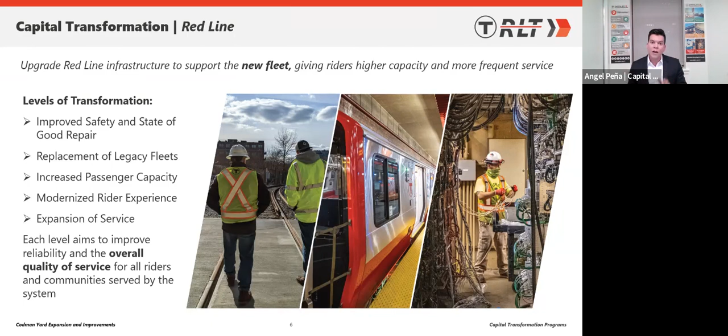Yards offer a designated place away from the main line where cars are cleaned, doors are inspected, parts are repaired, and wheels are adjusted. The yards and their facilities are critical for delivering that quieter, cleaner, and safer service you all deserve. In addition, yards provide a space for our new vehicles to be commissioned and stored without disrupting regular service, and on-time deployment of new vehicles is critical for higher capacity and increased frequency.

So here's a quick video showcasing those upgrades to give you an idea what all the yards and improvements are about.

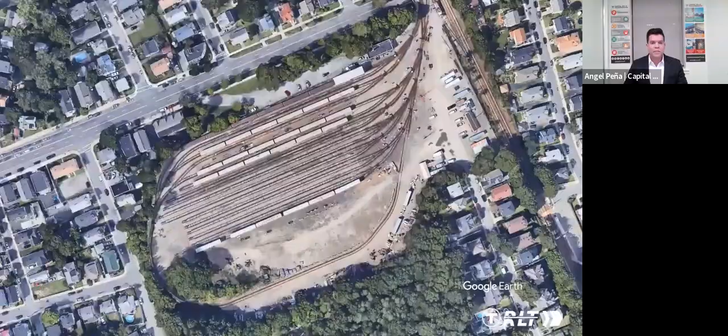The Codman Yard expansion and improvements has reached 100% design. Improvements made to this yard will bring fundamental benefits to the entire Red Line system. Like all capital transformation advancements, our goal is to improve reliability and overall quality of service for all riders and communities served by the system.

All existing tracks will be replaced so there will be less noise and faster turnback times. 6 new tracks will be added to the yard to increase storage for the new Red Line fleet. Improvements include a vehicle wash, improved inspection pit, rehabilitated storage tracks, 6 new storage tracks, and a bypass track.

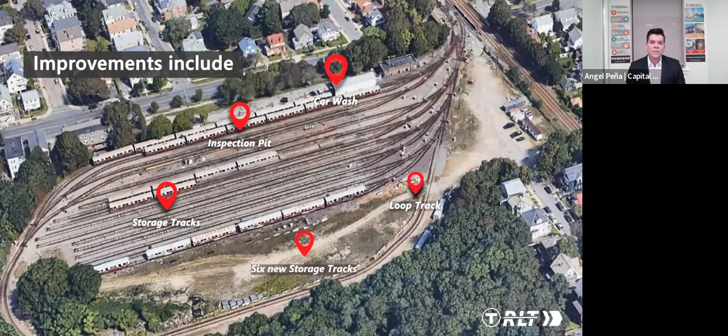These advancements will help improve reliability and efficiency, reduce service disruptions, and bring the yard to a state of good repair. Yards and their facilities help provide cleaner and safer service for the entire Red Line system. Adding additional storage tracks will provide space for over 100 vehicles. Finally, yards provide a space for our new vehicles to be commissioned and stored without disrupting regular service. Stay tuned for more exciting updates from the Red Line Transformation team.

As you can see, yards are critical to providing safe and efficient service for all riders. Although located in Dorchester, the work completed at Codman Yard will benefit the entire Red Line system, and this is why we're here. So Lisa, what are those conditions that we're facing today at Codman?

Thank you, Angel. Well, Codman Yard is one of several of our maintenance yards along the Red Line that stores, maintains, and inspects the Red Line vehicles. It's located just south of the Ashmont station in the city of Dorchester. The yard is over 100 years old and was last rebuilt in the 1980s, almost 30 to 40 years ago.

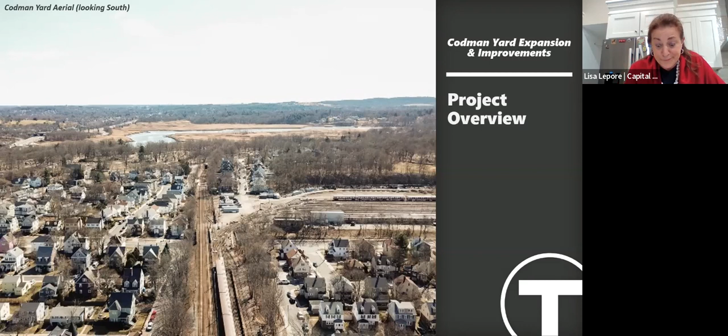The other improvement we want to add is that it currently does not have the adequate security features that we want to have in our yards, such as lighting, CCTV, and other security measures.

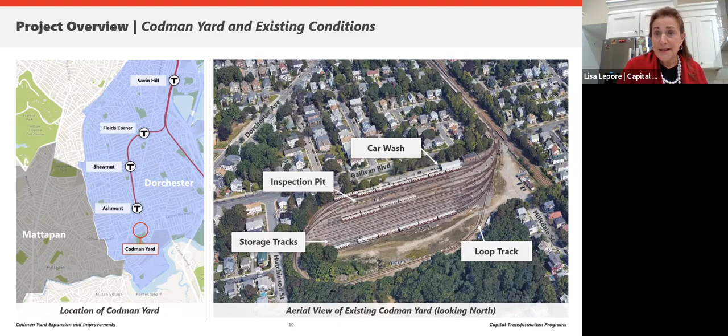The three main goals of the Codman Yard project are: one, to expand the yard by 6 additional storage tracks to increase capacity, highlighted in red on the slide. We will replace the existing tracks to the north of the red, taking the aged infrastructure and replacing it to improve reliability of maintenance of the cars. Thirdly, we're going to upgrade the lighting around the perimeter to control safety and security and improve neighborhood conditions.

As shown here, you can see in the footprint of the yard that there is existing space available within the existing yard perimeter and property lines to add these 6 tracks. We will not be expanding the yard or the site; we will merely be taking the area to the south and filling it with the additional tracks, which will give us 50% more capacity, equating to about 36 vehicles, giving us overall 100 car storage in the future.

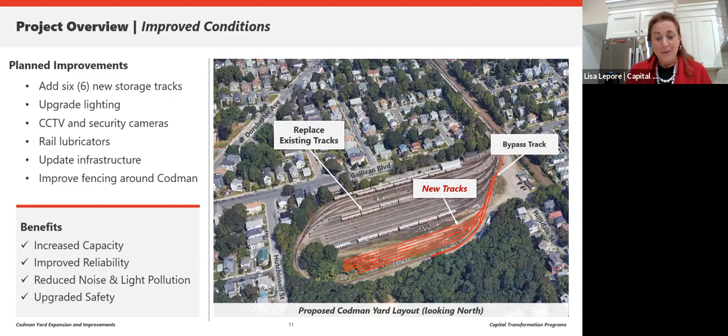The improvements made at Codman are critical to accommodating the new Red Line fleet and creating safer, more frequent service for all Red Line riders. As Lisa mentioned, the project includes adding 6 new storage tracks, highlighted in red, to the yard, which will increase capacity for an additional 36 vehicles, bringing the yard storage capabilities to over 100 cars.

Oops, excuse me, a little bit of a technical difficulty. Excuse me, folks.

Yes, we see you now. Oh, you see me now? Sorry, yes we do. We apologize for that, the button was a little bit frozen.

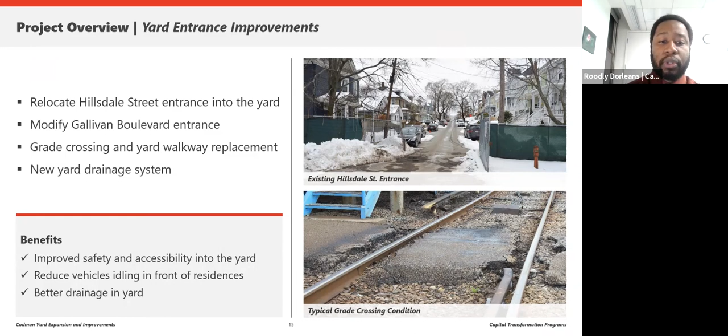To provide a safer work area for employees and contractors, the project will replace grade crossings and yard walkways. This will allow safer walking paths across and around the tracks. There will also be new yard drainage that will improve the overall storm management in the yard, creating a safer, more accessible environment for all employees. The drainage system is based on specifications set by the Boston Water and Sewer Commission to minimize impact to the surrounding streets.

One of the most significant components to train operation is power. Without power, the trains do not move. Power is a large part of this project. The improvements will overhaul the aging infrastructure. Within the yard, the project will replace third rail, duct banks, and cabling. This will continue with the addition of a utility bridge, which will run parallel to the existing track bridge over Gallivan Boulevard. This utility bridge will house the new cabling for traction power that will feed Codman Yard.

Located just south of Ashmont and before Gallivan Boulevard, the existing duct bank, which runs along the main line track, will be replaced. The project will place a mobile substation in the yard to temporarily power Codman Yard and the Mattapan high-speed line while the new duct bank is installed. There will also be an installation of new AC power feed into the yard.

And lastly, the installation of a new AC feed will help support the new light system that will be installed in the yard. The lighting system in the yard will be replaced using lighting that is more directional and more energy efficient. Lights will face more into the yard to minimize light trespass onto neighboring areas. This will help improve overall safety and security within the yard while minimizing light pollution and spillage.

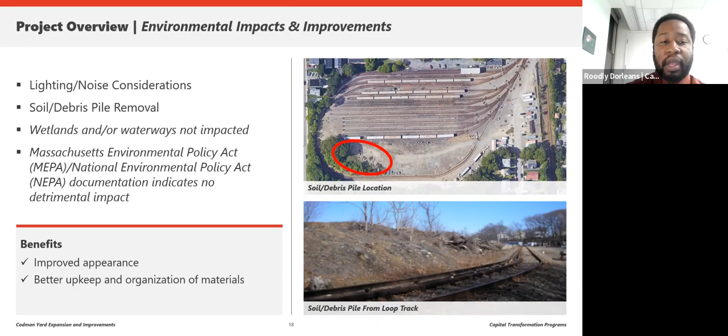So now let's discuss the construction and the impacts. We have explored several construction strategies and mitigation methods that will allow us to get the job done with minimal disruption to the neighboring areas.

Construction will begin in fall 2022, later this year, and will continue for 3 years with projected completion in fall 2025. Just prior to construction, we will have another public meeting to communicate the expectations prior to our builder mobilizing at the site.

As always, a major value of the red line transformation is to find ways to accelerate the work, to limit the disruption to the neighborhood, and to deliver improvements faster.

We're currently in the process of aligning objectives and schedules of Codman with our other projects, namely the Signals project in 2023 and track work in 2024 and beyond. By aligning these activities, we can avoid hitting these areas multiple times and causing further disruption to our riders.

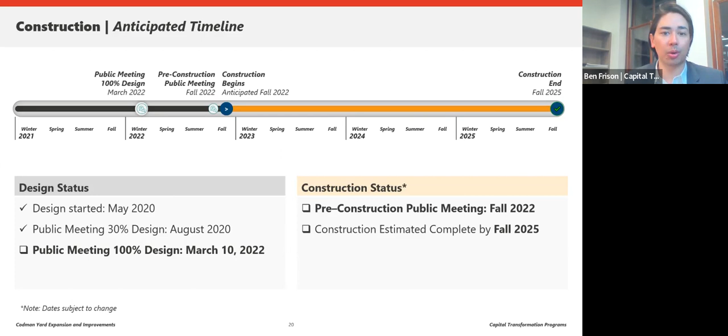So once we start work, what are the impacts to the riders in the local community? First, work will be primarily completed during the day while red line cars are out providing service.

Over the 3-year construction period that I pointed out earlier, we estimate that a few weekend diversions, anywhere from 4 to 6, will require alternative service with shuttle buses from Ashmont to JFK. We anticipate one of these weekends when busing on the Mattapan high-speed line will be necessary.

As with any construction, the development at Codman can be disruptive to the area. That's why it is a top priority for us to reduce noise outside of normal working hours as much as possible. Our strategy with contractors is very hands-on. We take these concerns seriously and communicate with them on a daily basis with those performing the work.

For example, regarding Hillsdale Street, we will be very proactive at preventing both MBTA and contractor vehicles from idling and taking away parking spots from the local residential area. As pointed out earlier, we're planning on moving the Hillsdale Street gate entrance into the yard an additional 35 feet as an additional noise measure.

Second, the installation of rail lubricators within the yard will also help to further mitigate noise throughout the yard as trains move around the tight corners.

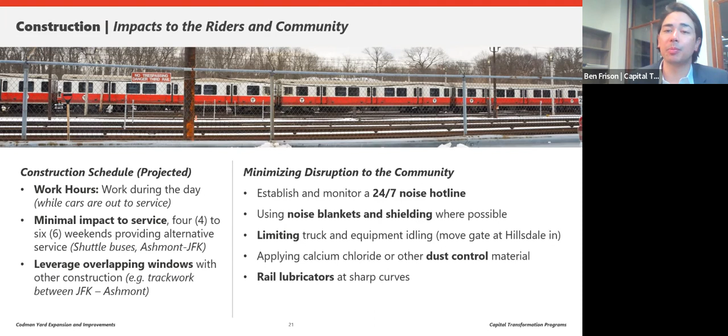Sure. I want to assure you that once we start construction, our priority is going to be to further minimize disruption and finish the job as quickly and safely as possible.

So looking ahead, we will select a builder and start the work by the end of this year. Once the builder is selected, we will have another public meeting with you and everyone to discuss in more detail the construction process, the logistics, such as mobilizations of crews and access to the yard like Ben mentioned.

But also with that, I wanted to discuss a little bit further how we're going to be keeping you informed on our progress. Public engagement and transparency are very important to us.

And we have been working closely with stakeholders such as the neighborhood services, civic associations, city council, and the local hospitals, and we will continue to do so as the project progresses. Our team will also continue to engage with the neighborhood surrounding Codman Yard.

We have distributed flyers to members of the local community in English, Spanish, and Vietnamese. We also provide weekly program updates to our email subscribers and to our website. One of the best ways to stay informed is to subscribe to our email list. You can always follow up with questions via email to the Red Line Transformation team at rlt@mbta.com at any time. So we want to thank you for your time tonight and your attention.

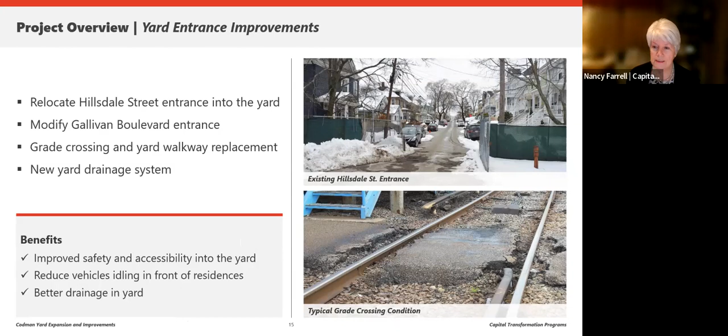Sebastian asked, will the team consider putting roofing in the yard so as to mitigate environmental wear and tear on the rolling stock? I have never heard that question, so that's an interesting question. I do not think that's at all part of the design. Doug, could you address that? Sure. Roofing an area like this would be really expensive. The biggest concern technically is the wind load that would happen for a roof over several acres. So the rolling stock is made to be operating in the wind and rain and other atmospheric conditions. So it's not currently thought to be an economical idea to cover it all over.

Okay, thanks, Doug. It also would make a bulkier kind of facility, wouldn't it? Or is that me just guessing? No, it would. It would be much more visually intrusive to put a canopy over something like this. That would definitely be something that would be seen for a long way. Thank you.

Lori says it's great to see the MBTA prioritizing the reduction of light pollution, noting that currently there are high lights that broadcast many streets away. Is there a time frame for when this portion of construction will happen - late 2022 or toward completion in 2025?

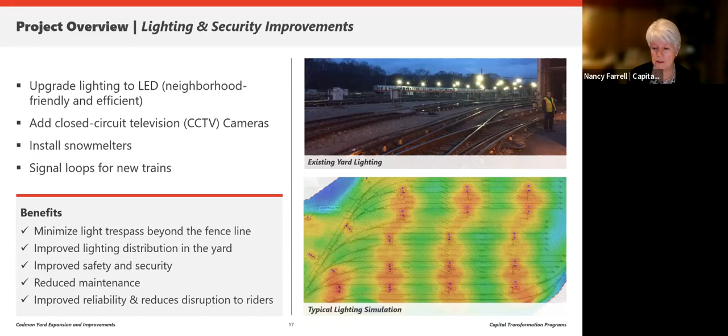Do we know when those lights would go in, or is that towards the end? That would be towards the end - you can't put them in while you're doing work, installing rail, and moving a lot of equipment. It's going to be towards the latter half of the construction period.

Maura says she's right next to the yard and needs the hotline. You will have it, Maura, and we'll answer all those questions as quickly and responsibly as we can. As soon as there's a contractor on board and we have our public meeting and you've met the contractor, there will be a hotline you can call with any questions or concerns.

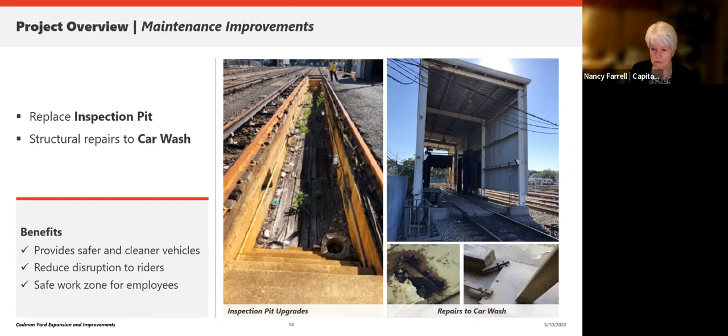Ben responds: I think that's a great thought, actually. I will say that our priority here with Codman is to ensure that we are strategically in the position to accept the Red Line vehicles, which will expand capacity quicker for the riders. There are many different yards across the Red Line where we could put an additional car washer and inspection pit. For the purposes of Codman, we're basically here to expand the yard and bring the yard to a state of good repair. Thanks, Ben.

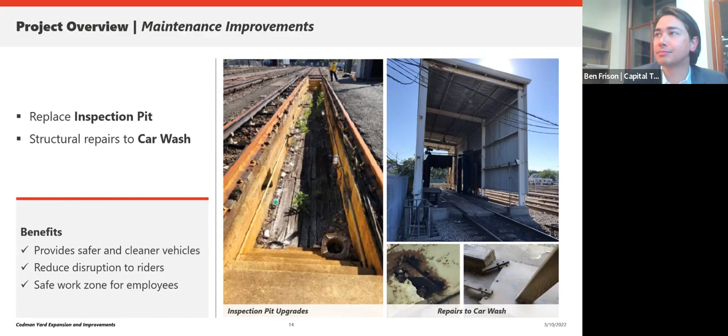Someone asked, would this help with the squeaking of the trains moving in and out of the yard? Rudy did talk earlier about the rail lubricators. Could you just briefly summarize that, Rudy, in case people missed that information?

Well, two things, and I think Ben touched upon it too during construction. The Codman yard hasn't been replaced or worked on for over 30, 40 years now, and you have old tracks there. So with a combination of new tracks and the rail lubricators that will be strategically placed throughout the yard, that will minimize the squeal of the wheels of the trains throughout the day, particularly around the loop track in Codman Yard. These lubricators spray a type of mineral or oil along the tracks to provide a smooth transition throughout the yard.

Thank you. I have a couple more questions about idling. Again, these are operations questions, and if you send us an email directed to us, we will be happy to pass those questions on to the operations team. We really don't want to answer on their behalf much more extensively than we have so far. You can follow up with questions to us by writing rlt@mbta.com at any time, and we can direct those questions to the right sources. I'm seeing two hands raised at the moment.

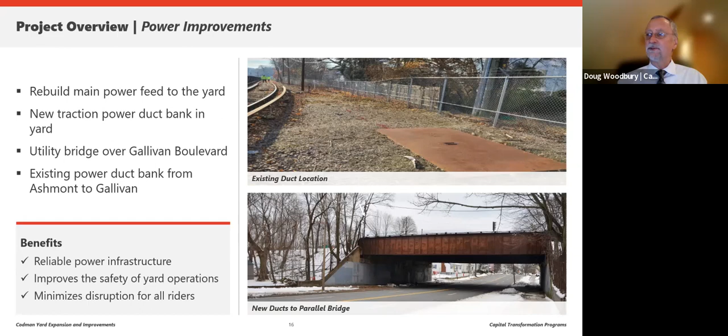Design's not done yet, but it looks like it's going to need to be entirely replaced as part of that project. So yes, this bridge will be removed. The new ducts will be put across it, not attached to this, because it simplifies construction in the future, so that you don't have to worry about disrupting the power on this while you're redoing the bridge.

Thank you, Doug. Okay.

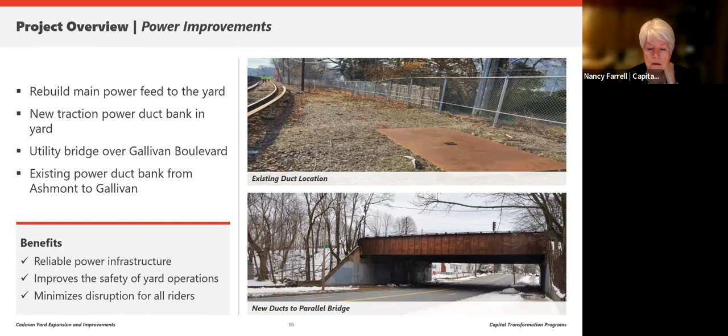Robert's asking, what is being done with the uses currently in the location where the new tracks will go? Can we see that diagram again, which shows where the new tracks are going? That slide. There we go.

Basically, it's space that is not in use. And Doug, can you comment on what's there now? Yeah, there's some miscellaneous storage of materials in that area. There's really not a whole lot going on. So it's basically going to contribute to the overall cleanup of the yard, to be a nicer looking facility by putting the tracks in there. There's really nothing else there.

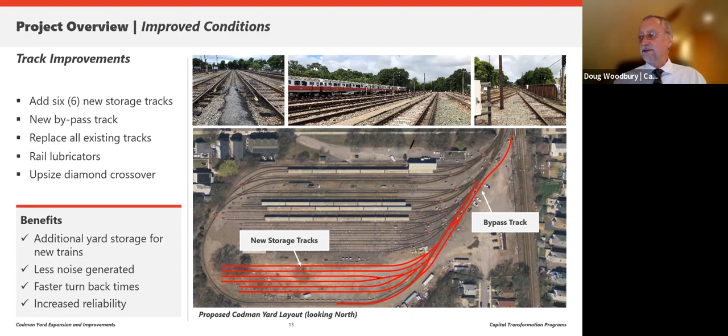Okay, thank you. We had a couple questions about sound barriers to offset the noise, and we have discussed this as a team, and I wonder if Doug, you would summarize the investigation that was done into the sound issues.

Sure. So we did a fairly extensive study on the sound generated from the yard. Some of you may have noticed us setting up microphone stands to record this over an extended period of time. The conclusion was that the yard actually generates less noise than the traffic noise from the surrounding streets, with the one exception of when trains go around that loop track with the wheel squeal that we talked about. That was the single most significant noise generator out of the yard.

So we've talked about putting in new lubricators to mitigate that. What we're trying to do is be a good neighbor. With the new track work, some of the impact noises you hear over the old tracks are going to be mitigated. And with a bypass track, again, that goes through fewer switches, and there's a ka-chunk noise every time you go over a switch. It goes through fewer of those. So we're going to be contributing to reducing the overall noise out of the yard.

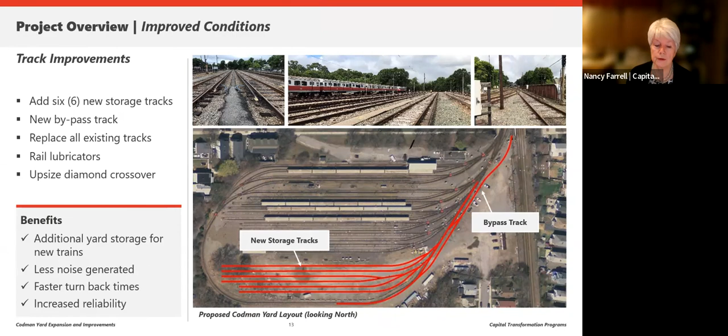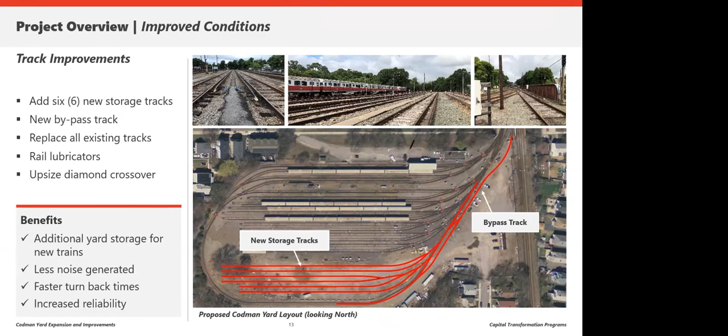And Maura, one quick question. You can unmute yourself. Okay, oh, I can talk. Hello? There you go, yep.

Hi, I'm sorry, I'm with Sheila Hennigan. She is at the end of Hillsdale, 33 Hillsdale. She is seriously worried about everything that is going to happen to her house. I'll let Sheila tell you. Go. I want to know, is the Gallivan Boulevard entrance going to be the main entrance?

It won't be the main entrance, it'll be one of two entrances. I'm sorry, Sheila, we lost you? No, I'm not hearing Sheila anymore. She can try to come back.

I do have Todd Limming, I think, with the city's Public Works Department, who wants to reach out to our team. So we will definitely reach out to you, Todd. Can you hear me? Oh yes, I can now. We couldn't hear you for a while. Okay, I'm sorry.